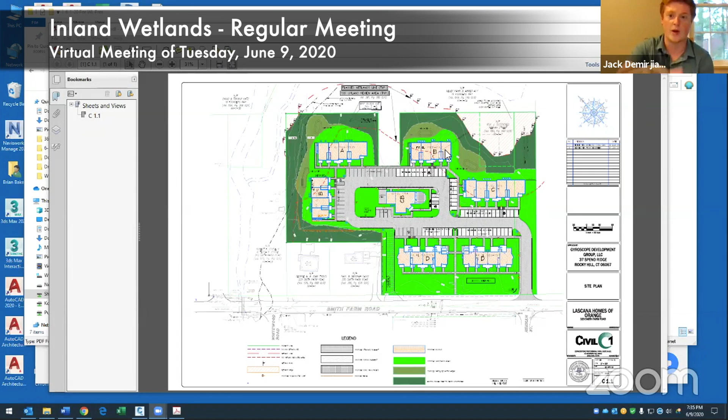So we're going to do, actually, you want the site plan up first? Correct. Okay, can everyone see that? Not yet, I don't see any site plan. No, do we have to push share screen too? No, it should only be him. Yeah, okay, it's just him. Should be able to share the screen. Oh, there we go, yep, now we can see something. Yep, there it is. We have a good number of people in here, so it's probably just going to take a little while for everything to load. Well, thank you, Jack.

Well, thank you. This is the site plan. I think you all know the property is just northwest of Route 1, with Smith Farm Road being the street on which the property has frontage. It is actually a total of 6 properties that have been assembled, one of which is the extension of Neenan Street, which is before the town meeting for abandonment. That's only 0.2 acres of the total, but it's an assembly of 6 parcels.

There are 2 existing and occupied homes, which you can see at the lower left there. Those are not part of the application, and they will remain after the development. So the overall development plan is 7 buildings - 6 residential buildings and a community building - totaling 46 units.

In terms of the wetlands application, as you look at the site plan, I would summarize the relevant features: there is an intermittent stream, maybe a perennial stream, that goes along the corner of the site plan you're looking at. Then there is a wetland soil in the northeast corner, the upper right of the site plan. Probably the most important thing is there is no direct impact to a wetland or watercourse - no filling, no grading, nothing within a wetland or watercourse.

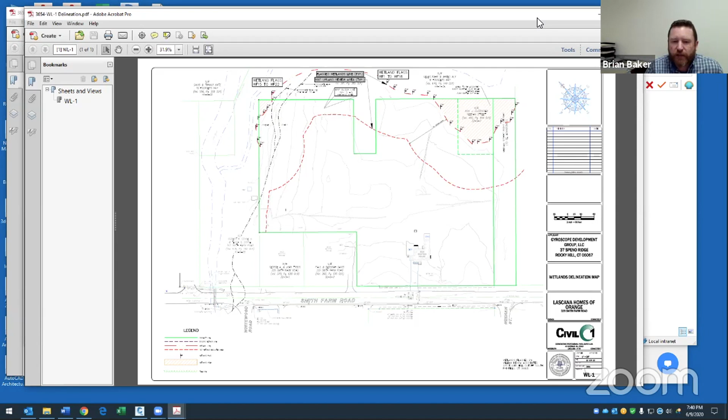Thank you, Tim. Brian Baker here. I'm a licensed engineer in the state of Connecticut. I'm also a certified professional in erosion and sediment control and a certified professional in stormwater quality. We're at Civil 1 with offices in Woodbury, Connecticut. We prepared all the site plans for GDG, so I'll give you a brief overview of the existing conditions and then the proposal.

So what you have in front of you is an existing conditions map that shows the wetlands delineation. Property line outlined in green here is a 4.05 acre property. As Tim had mentioned, this sliver of land here is the Neenan Street right-of-way. It's in the process of being abandoned, which we'll use for access. Currently, there is one existing house here on the parcel shown along Smith Farm Road.

Approximately 3/4 of an acre of the property along Smith Farm Road there is open lawn area, with the remainder area in the back being wooded.

As far as topography, you have a high point sort of in the center of the site here around elevation 117. And then the site gently slopes both to the east and the northwest and to the southwest with grades of about 3 to 5%. So very moderate grades, so easily developed.

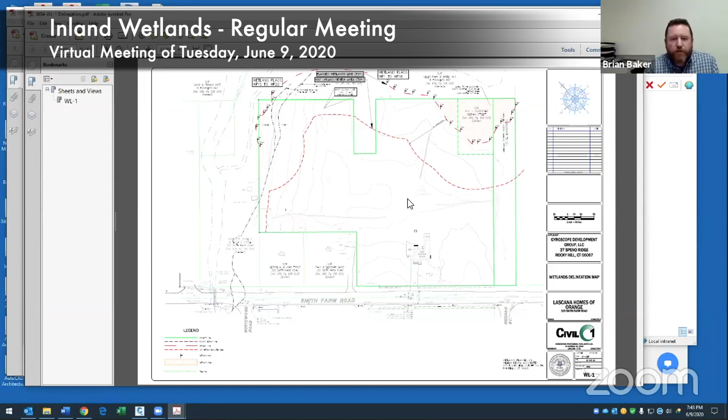The upland soils on site are a combination of Agawam, Canton, and Charlton soils. Those are hydrologic group B, which are considered a well-drained soil with groundwater elevations down deeper than 80 inches below the surface. So these soils are perfectly suited for infiltration techniques for stormwater, which is what we're going to propose.

Besides looking at the soils mapping that was available online from the USDA, we actually went out and did 17 test pits of our own, which confirmed these deep sands and gravels and good percolation rates for the soils for our stormwater design.

As far as existing utilities, currently along the frontage there is no water or sewer, but we do have a water main that ends near Whitewood Road, which we're going to extend to service the property. The gravity sewer line on the plan to the right, which would be east, is Boston Post Road. About 300 feet east of the property is the existing sanitary sewer line, and we're going to extend that up the Smith Farm Road shoulder in the right of way, and we'll be able to get gravity service for the sanitary sewer for the site.

So now let's go back to the site plan.

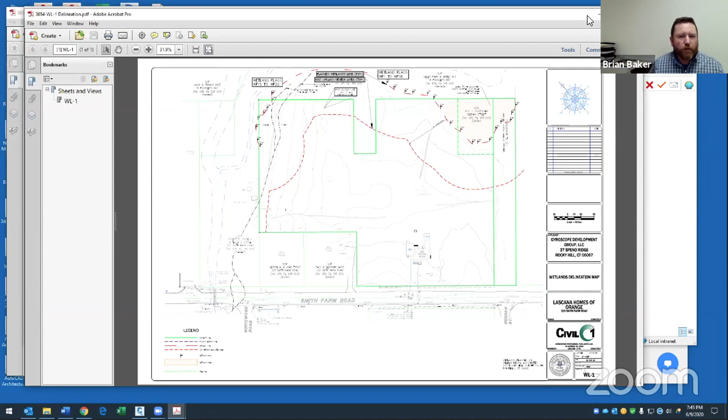As Tim had mentioned, we have 7 buildings. There's 6 multifamily residential buildings and a community building in the center of the property. We have a total of 46 units with 92 parking spaces, so we have 2 spaces per unit provided.

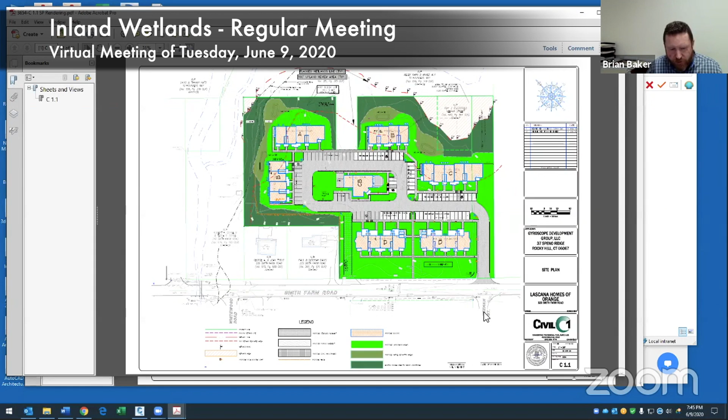Access will be through a private driveway across from Neenan Street, the existing paved Neenan Street, up the Neenan Street right of way and into the property via the private driveway. We have very moderate grades on the site, so the entire driveway and circular roadway within the site have grades of 1.5 to 2.5% slope, so very moderate, pretty flat overall.

We do have an emergency access drive, which will be reinforced grass turf, just north of this northern building D. That was at the request of the fire department, so that would be reinforced turf that can be mowed should it need be. That provides a secondary access, egress out of the site or into the site in the case of an emergency.

Let's talk a little bit about the erosion and sediment control plan and the drainage plan. Pull that up.

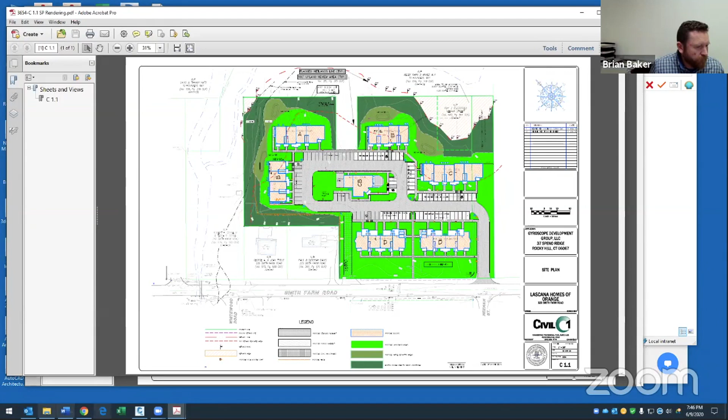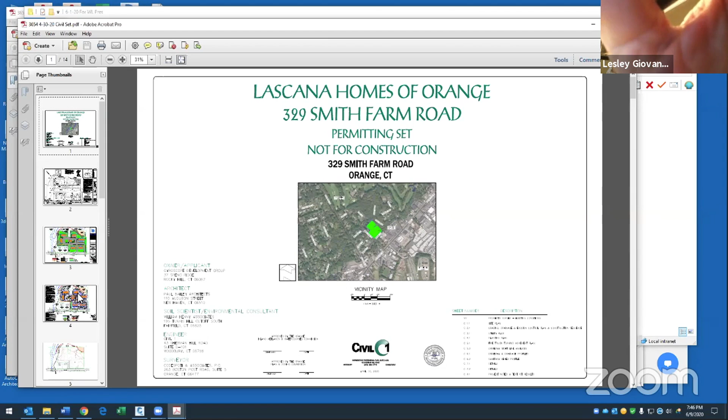In any case, as I mentioned, we have the high point in the center here, so any of the drainage areas that flow back towards the wetlands or towards Smith Farm Road are all less than 1 acre, and therefore we've proposed erosion and sediment control as a geotextile silt fence. Additionally, in the area closest to the wetlands in the regulated area, we are going to back those up with staked hay bales.

Additional measures for erosion and sediment control, typical for a construction site like this, would be a stabilized rock construction entrance, hay bale filters or silt sacks for any of the catch basins, and we've also shown temporary soil stockpile areas that would be encircled with silt fence during construction.

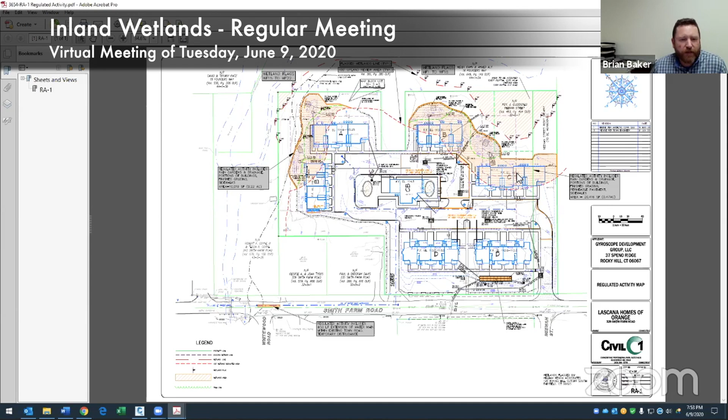You can see that activity is for the two rain gardens, which you want adjacent to the wetlands or in the regulated area typically. The two rain gardens, a portion of building B and building C, along with the finished grading behind them, a small section of sidewalk in between buildings B and C, and an even smaller section of pervious pavement. You see these corners touch into that 100-foot regulated area. So that's the activity in this section.

Then in the northern corner of the property, associated with wetland flags 15 through 22, you can see the two floodplain lines here with no activity in that area. The orange activity within the 100-foot, similar to the previous one, includes two rain gardens, one for building B, one for building A, a small portion of the buildings themselves, and sidewalk. There is no pervious pavement or any other paving within the regulated area over here.

Just to be complete, we noted that the existing water main in Smith Farm Road crosses over Silver Brook and stops past this 48-inch culvert that goes under Silver Brook. So we're going to be extending from where the water service currently ends, and that first 50 linear feet or so of water main extension in the existing Smith Farm Road would be within the wetland regulated area. That would simply be cut and excavation of the existing paved road, installation of the water main, then backfill and repaving—a temporary disturbance.

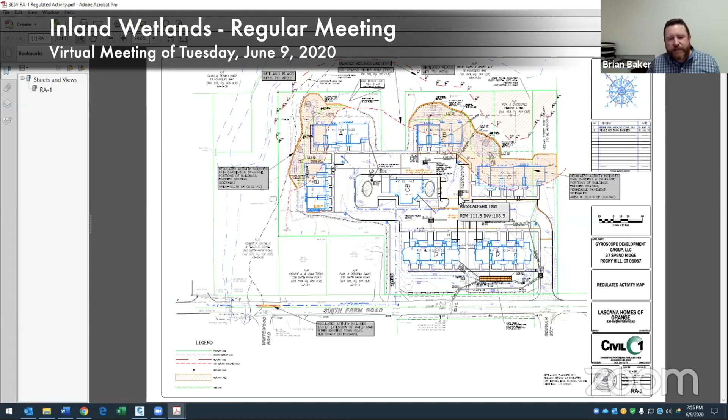To give you an idea of scale, as far as the size of the property in relation to Trout Brook and Silver Brook that come down north of the property, the overall drainage area that comes down through Silver Brook at this point is 1.9 square miles. Just about 1,200 acres drains to this point. Our total site at 4.05 acres, which we're not even developing entirely, would equate to 0.3% of that total drainage area. So a modest drainage area in comparison to the overall drainage area in the area.

So again, we don't believe we'll have any negative impact to the wetlands or the adjacent stormwater system in Smith Farm Road. With that, I'd like to turn it over to Bill Kenny, and he can talk a little more in detail about the wetlands themselves, what he found on site, and his opinion of the design.

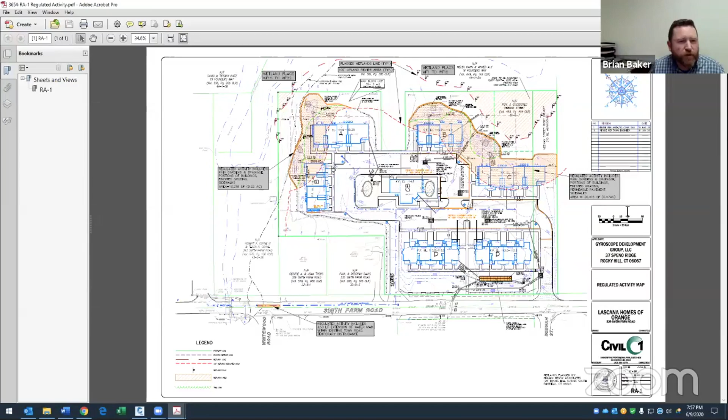Brian, I can stop share. Bill, are you gonna mute yourself? Sorry. Thanks, Brian. You got it.

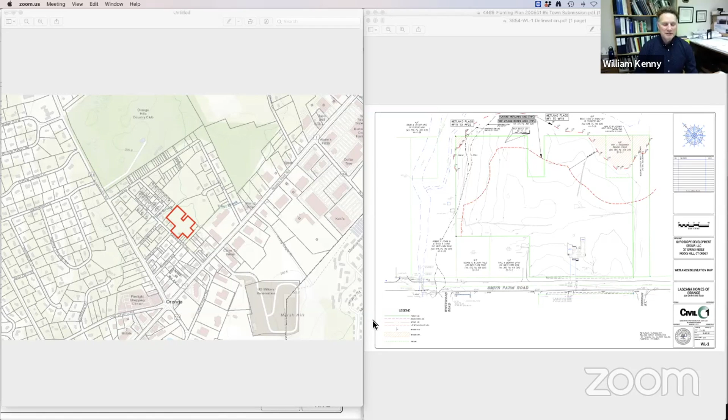Good evening. My name is Bill Kenny. I'm the principal of William Kenny Associates. We're located in Fairfield, Connecticut. I am a professional wetland scientist and soil scientist and landscape architect.

My firm was retained to help with this project in a number of ways. We assisted with identifying and mapping wetlands on the property, then inventoried and assessed the wetland habitat and other habitat nearby, and also assisted with the design of the project so that it could be designed to avoid adverse impacts to the wetlands or watercourses on the site or off-site.

In addition, some of the detailed design work we did was put together the planting plan for the project, which I will share with you shortly.

I have two maps that I'm showing here. One, on the left-hand side of the screen, is a snapshot of the town GIS map, and in red is the project site, excluding two lots, the Neenan Street right of way and another parcel. But this is generally the property.

We have Trout Brook, which flows from the east and then comes across and connects with Silverbrook, and then Silverbrook continues west and eventually enters Indian River downstream.

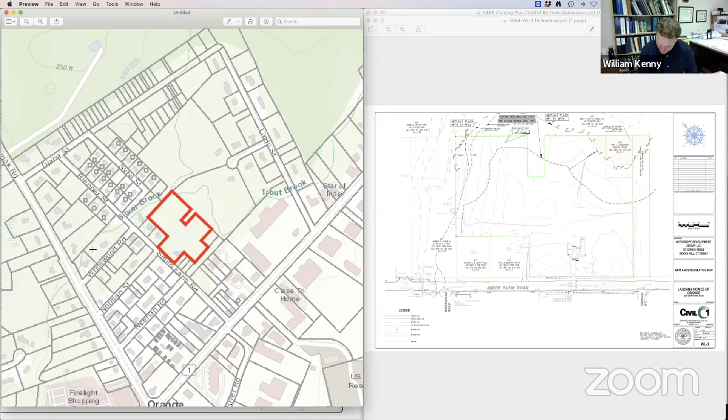And the site, as has been discussed, is relatively level, and the soils, as Brian indicated, are excellent soils for drainage. The sand and gravels have great porosity, infiltration rates, and due to that, and due to the relatively gentle slopes on site, the potential for erosion on this site is very minimal.

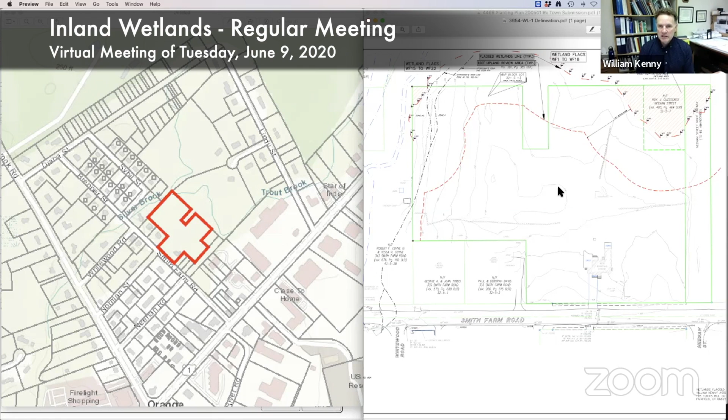And the watershed, as Brian indicated, is relatively small, because there isn't acres and acres of offsite land contributing water to this property. Water that's flowing nearby is just that—it's flowing off-site from other off-site areas and not flowing onto the property.

Associated with Trout Brook in the northeastern portion of the property, there's a wetland bordering where Trout Brook flows through. It's a typical red maple swamp, and it extends onto the site—approximately 10,000 square feet of wetland in this area. Then as the brook flows around, the wetland follows that around off-site.

Where the brook connects at the north of the property with Silverbrook, the wetland becomes more of a floodplain wetland, influenced by the flows of Silverbrook more than Trout Brook at that point, and that's where the floodplain starts to come into play. There's just a very small area of wetland that extends onto the property at the north corner, less than 1,000 square feet.

And then Silverbrook continues to the west and flows under Smith Farm Road via culvert, just northwest of the property.

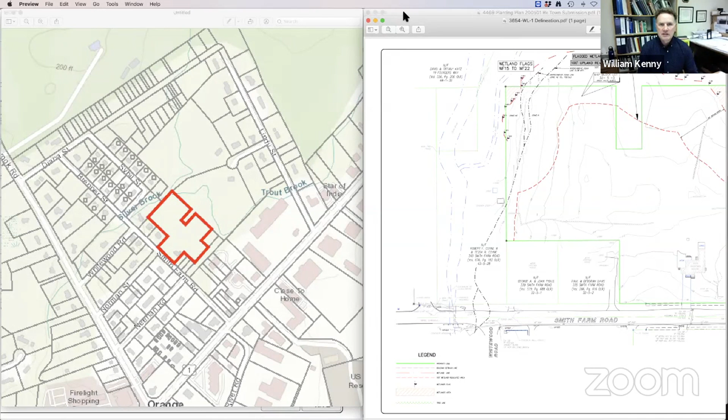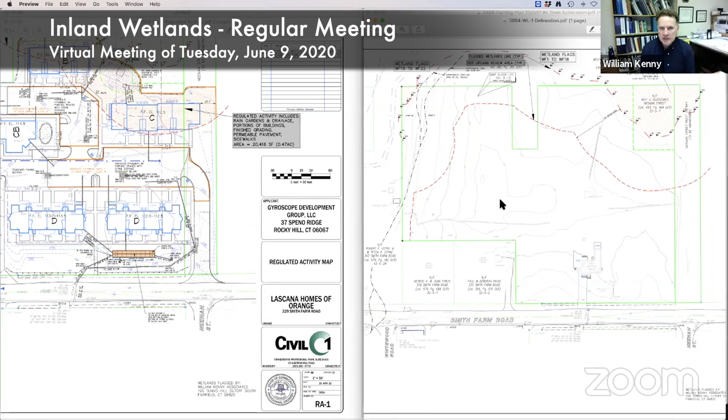In addition to the work, Scott Stevens, a soil scientist, originally flagged the wetlands on the property, not including this Neenan Street right of way. He did that in January of this year. When we conducted our work, which we did in April, I reviewed the wetland mapping that he did, which excluded the Neenan Street right of way—these two areas. I reviewed his work, and I agree with the boundary limits that he marked, so we're in agreement with that.

And then in May, we returned to the site just to add this additional area, flagging this additional boundary area along the Neenan Street right of way.

In addition to the environmental work that my firm did, which focused on ecological conditions, wetland conditions, and other ecological conditions, as Tim noted, a phase 1 site assessment was conducted by GeoQuest of Rocky Hill, and they found no issues with relationship to environmental contaminants—no remediation is needed, and everything was below any type of state standard.

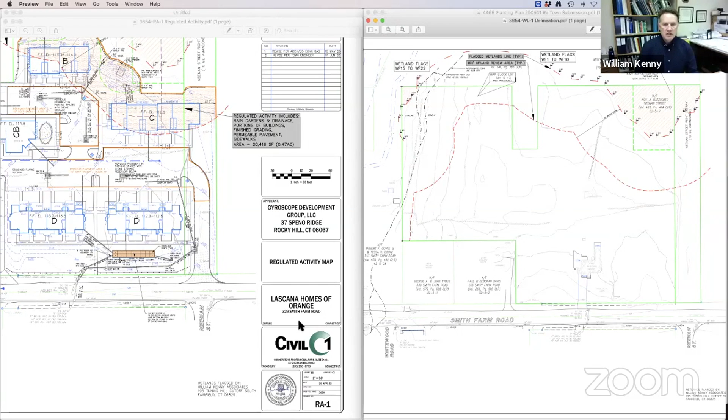So we looked at the development for the potential to have an adverse impact on inland wetlands or watercourses. In summary, we find that the project will not have an adverse impact on inland wetlands or watercourses or the functions that they provide. This is for the following reasons: first, there are no activities proposed within wetlands at all—no crossings, no fill, no disturbance to put in a utility line, build a road or driveway, stormwater outfall, or anything like that. So either during or after construction, there won't be any disturbance of wetland or loss of wetland area. The only potential for an impact would be from activities occurring outside the wetland.

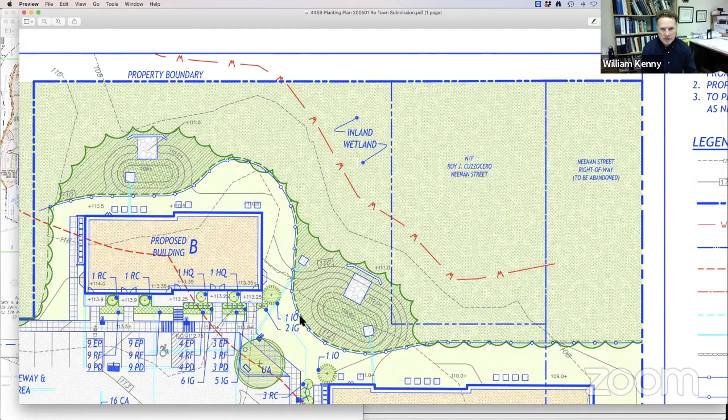A proposed split rail fence will follow the boundary of this area to ensure there's no encroachment with a lawnmower in the future. And that's in the southeast corner of the site.

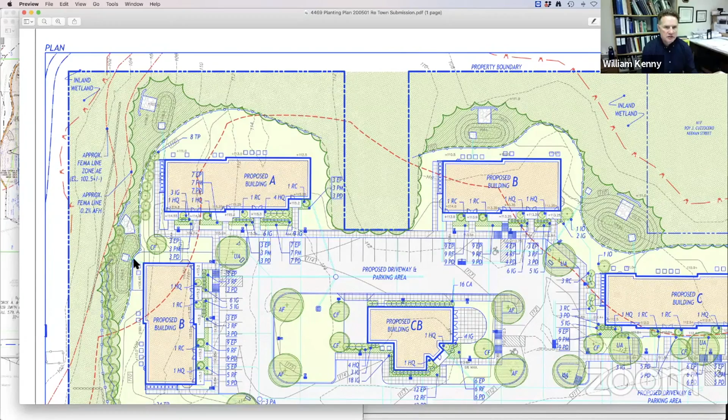In the northern portion of the site, it's a very similar condition. We'll be restoring portions of the upland review non-wetland regulated area. Again, native meadow grasses, meadow plants, and flowering plants will be established, and a split rail fence will be installed to prevent intrusions into that area.

There's an existing feature that's also very helpful for protection in the future, where Trout Brook and Silver Brook are just off-site to the north and northwest. There's a significant existing stone wall that runs here, and we're also proposing a privacy fence right here, along with planting of evergreen trees. So there's quite a layered system of privacy fences, split rail fences, rain gardens, and existing stone walls, providing good layers of protection for the wetland areas.

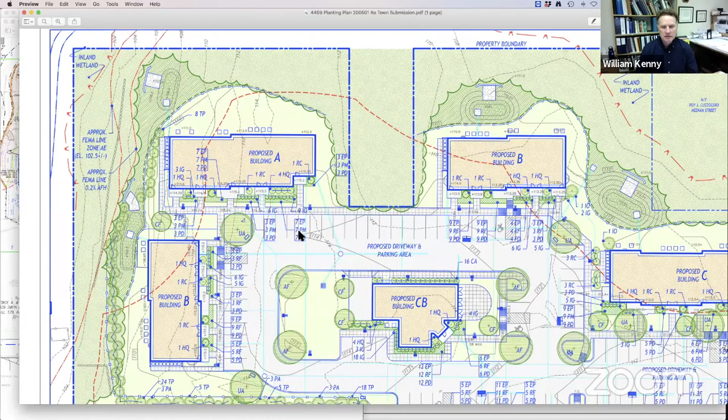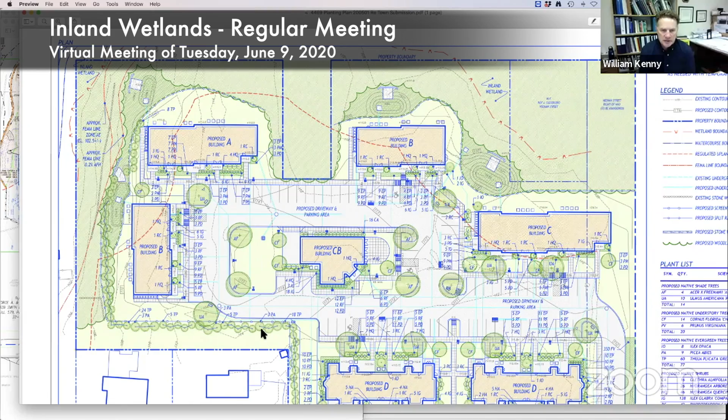Lastly, I'd like to note that the vast majority, nearly all the ground cover, shrubs, and trees that we're proposing on the plan are native plants. We really like to work primarily with native plants. The few places where we haven't, for example with evergreen trees where we're doing some screening due to deer browse, we often use a spruce or a green giant arborvitae, which are not invasive but fare better with deer browse. So we use them in those situations, and because they're not invasive, we think that's a good solution. But the remainder of the trees, shrubs, and ground covers throughout the development are native plants.

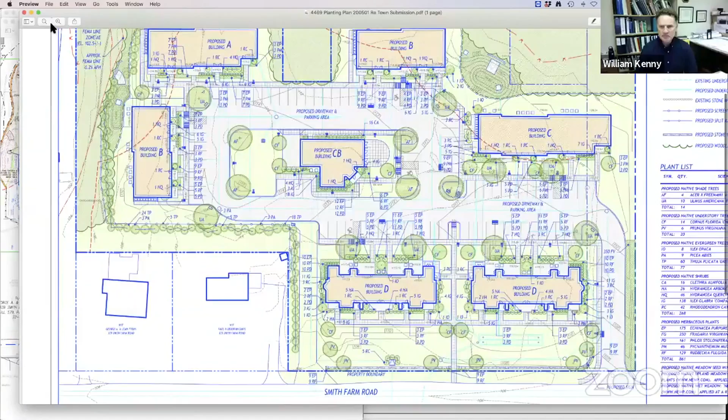So it's for those reasons that it's our professional opinion that the project will not adversely impact inland wetlands or watercourses and their ability to function, and that's for both areas that are on site and off site. If you have any questions, I'd be pleased to answer them.

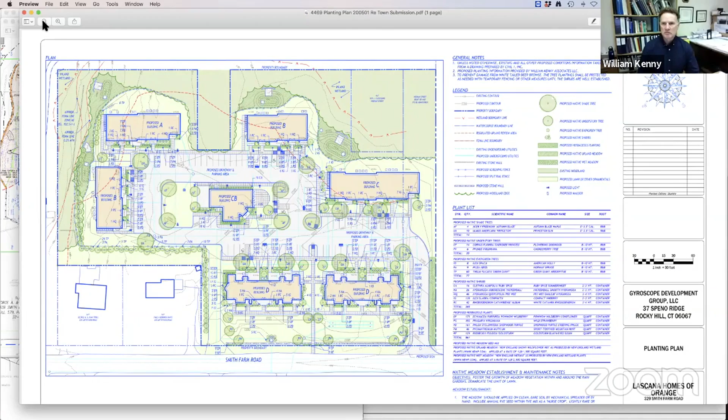I have a question about the... Thank you, Bill. Oh, go ahead. I got a question about the pervious asphalt drive, I guess it is. Yep. I don't know who that'll be for, but why won't the sand and salt clog it up?

When you have pervious pavement, you actually don't use sand for any snow. Typically we're calling for a liquid de-icer, and calcium chloride is typically used. The other advantage is, it does need to be vacuumed and swept twice a year. That's typical maintenance for pervious pavement, and I found that works and keeps it clean. Again, there would be no sanding done on the site.

Additionally, because we have relatively flat slopes here, 1.5 to 2.5% driveway slopes, there's not much potential for slippage. So as long as we do snow removal, that should take care of it. The other thing is that pervious pavement itself, because it allows for porosity down into the subsoil, University of New Hampshire has found that those areas actually don't collect snow nearly as much as standard pavement areas, because they allow some of that temperature from the subsurface to come up through the pavement. That's typically why you don't have clogging issues. But it does have to be maintained, swept, and vacuumed typically twice a year, and that's called out in our maintenance schedule.

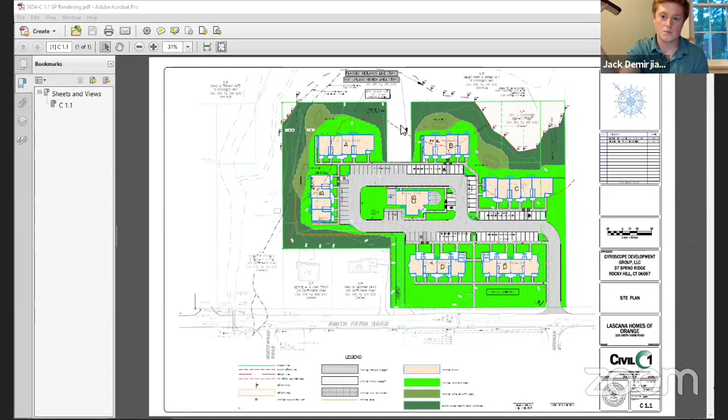Might be somebody else's property. Jim, do you mean this spot in here? Yeah, you mean that keyhole, correct? Yeah, Jim, we can hear you faintly - are you talking about the keyhole in the back of the property? Yeah, that's what he's speaking about. Yeah, that's part of the property to the north.

The Khan and Ali property. So the property actually juts into this piece, so that's an out parcel, basically part of the parcel to the northeast. You might have to speak a little more into the phone, Jim, please. That was property you couldn't acquire? That's correct.

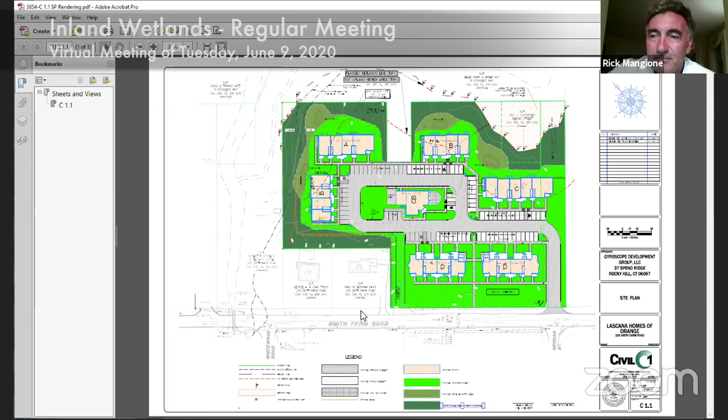Other than that, there was no input from anybody that I know of. So any other concerns out there? If not, they could bring us back a maintenance schedule. See if you could speak to Regional Water Authority about doing those two curb stops. Anyone else have any other questions or things for them to bring back?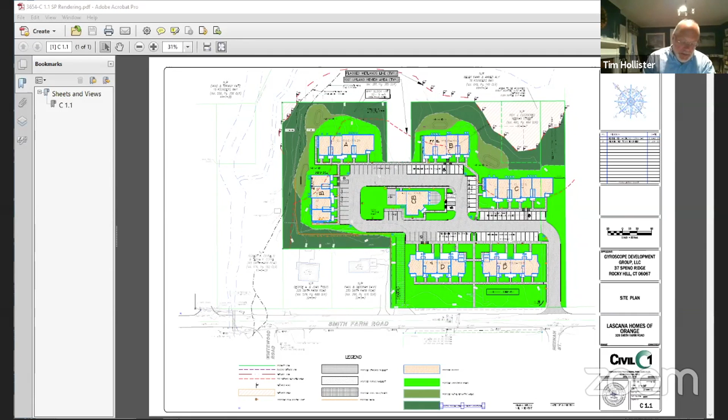Okay, we have those two items, Mr. Chairman. We'll take care of those. If there isn't anything else, I guess that's it for this. If whoever's screen sharing could bring us back to the homepage, thank you. The next meeting is July 14th, for everyone to know that. So if you could get that information by then.

Would the commission consider passing us on with those as conditions that we submit them to Jack? Just make that suggestion—send them to Jack and he'll email us the information, and then we'll see. So would you like to hold off on voting until those stipulations, or vote including those stipulations depending on approval or denial? I would like to review the plan a little bit more, just in case we have other questions.